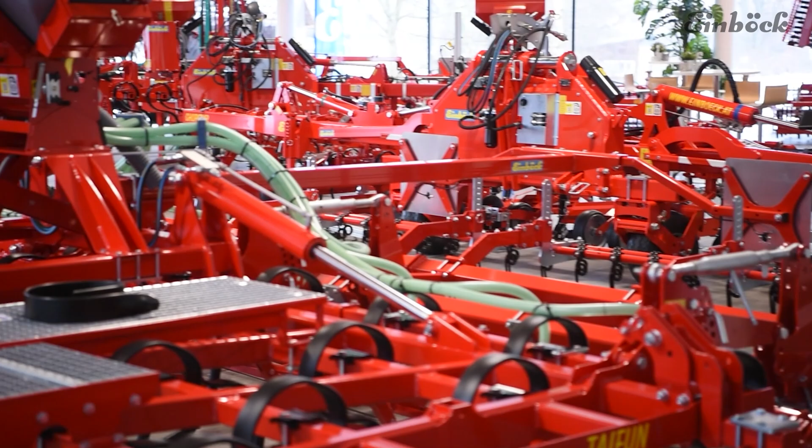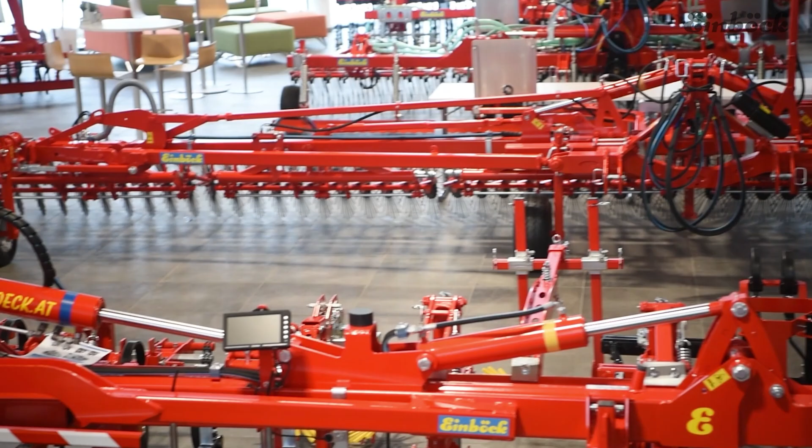Yes, and after this short introduction in our showroom, we are starting with our presentation about economical grassland care, how to increase feed quality and secure yield. And Johannes, what are our topics today? So the topics for today will be, of course, yield targets and especially yield targets in mid-European countries. What are the problems in grassland, management errors, and how you can optimize your grassland with the perfect components.

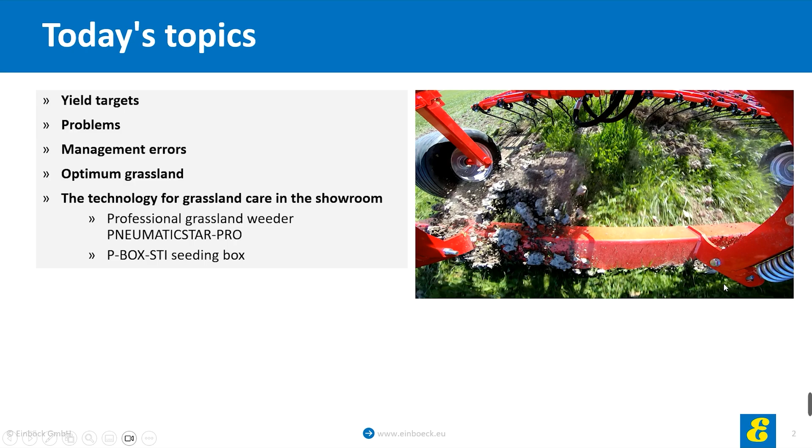From the technical side, we will discuss a little bit about our most professional grassland weeder, the PNEUMATICSTAR-PRO, which will be also then shown in the showroom, as well as the P-BOX-STI with our demo box. Yes, before we talk about grassland care, we are talking a little bit about our company. So Einböck was founded in 1934, which means we are this year 90 years old, and it's managed in the third and fourth generation by the Einböck family.

We have one single production site in Upper Austria near the German border and 100% in-house competence. That means from construction to cutting, welding, painting, assembly, and to the delivery, we are doing everything on our own. That's approx 90% vertical integration. We have a team of 225 employees and about 15 to 20 apprentices, and 90% of our machines we export.

What is very important to us is environmentally friendly production. So it's not only important to produce environmentally friendly machines, also the production should be like this. And the total production area is about 75,000 square meters. So after this short introduction about the Einböck company, we are starting right away with today's topic.

So we're gonna ask ourselves today four quite important questions when it comes to grassland care. So the most important, I guess, is how satisfied are you with your yield and your grassland in general? What is the energy content and what is the protein content in your grass silage? What is about the substance on the grassland? Is it heavily matted or do you have a lot of weed pressure on your grassland, which is reducing the quality? And then, of course, how can I improve the quality of my forage and also the yield within the recent years?

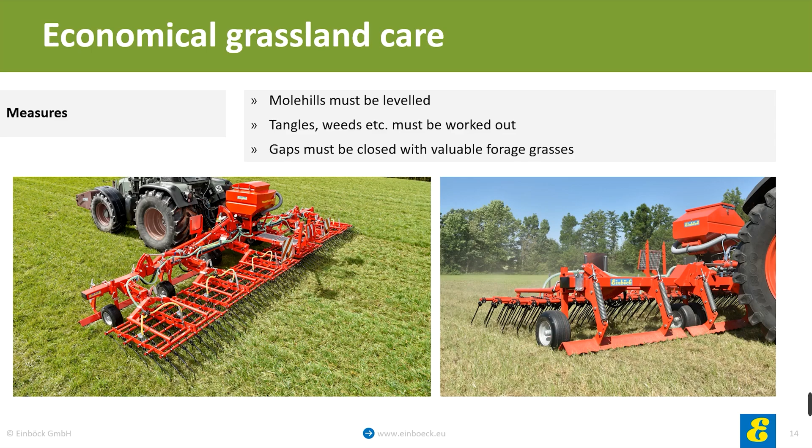So what is important for perfect grassland care? The molehills from spring should be leveled out as well as possible. Tangles and weeds, but also dead and old grass need to be worked out, and in very hard cases will be driven away from the grassland with a loading wagon. The gaps need to be closed then with high quality grasses and herbs. Otherwise the weeds will get back into these gaps and grow again.

So when to reseed? When is the right time to do the reseeding? There is not only one answer for that. We can reseed with the first pass in the spring, just adding approx 10 to 15 kg of seeds depending on the gaps. The spring helps the seeds to grow due to the high humidity. After the first cut, there is also a possibility to reseed, but it's only recommended in areas with higher humidity.

For a total renewal, with weeding 2 or 3 times and driving away the old material, we choose the late summer or maybe the autumn. After the cut, the grass is not so strong anymore, and the reseeded grass in the gap can grow with lower competition than it would have in spring.

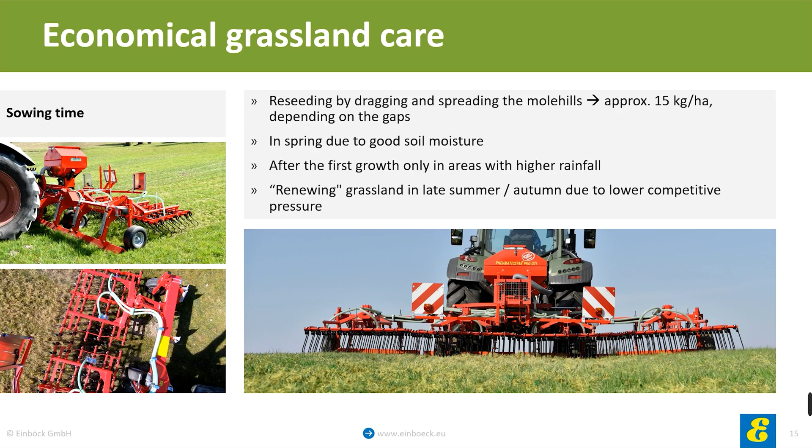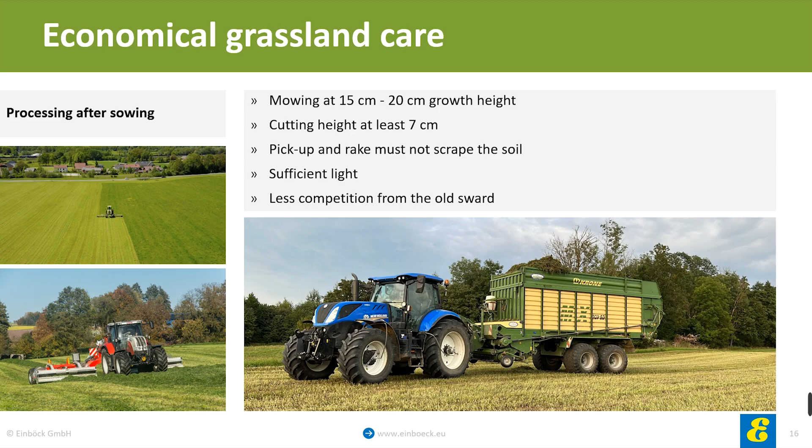After reseeding, the first cut should be done when the grass is approx 20 centimeters high. The smaller reseeded grass needs light again, and cutting height should not be lower than 7 centimeters. Then take care about the rake and the pickup. They should not be too low, so the seeds are not pulled out of the soil again. Through the early cutting, the new grasses and herbs have more light and do not have so much competition from the old sward.

So what could be different grass mixtures we can use for a proper reseeding? One of the most popular grasses is the English or German ryegrass, which has a quite high forage quality. It is resistant when cows are grazing and there is wet weather, and also tolerates frequent cutting, so we would say 4 to 5 or maybe 6 times a year. It grows quickly and is very good for closing gaps, so it's perfect for reseeding.

Then we've got, in addition, the Timothy grass, which is also quite resistant and is also really resistant during the winter. Still, it is a high forage quality grass. Then legumes and important sources of protein are the clover, I would say, a good gap filler, and it binds nitrogen. Also, we use red clover or lucerne alfalfa, which is quite durable during dry periods. And then, of course, in the mixture, we would need some herbs, which are giving the food some taste, I would call it, and increase the mineral content.

So how could we summarize this all? Of course, we need to determine the causes. What are the reasons for my lack of forage yield and quality? Weeds, gaps and meadow grass, lack of high quality grasses and herbs in the mixture, damage due to heavy tractors or mechanical damage by animals. That all needs to be sorted out and counteracted with the right strategy of reseeding and weeding. And then, of course, the harvest will be increased successfully again.

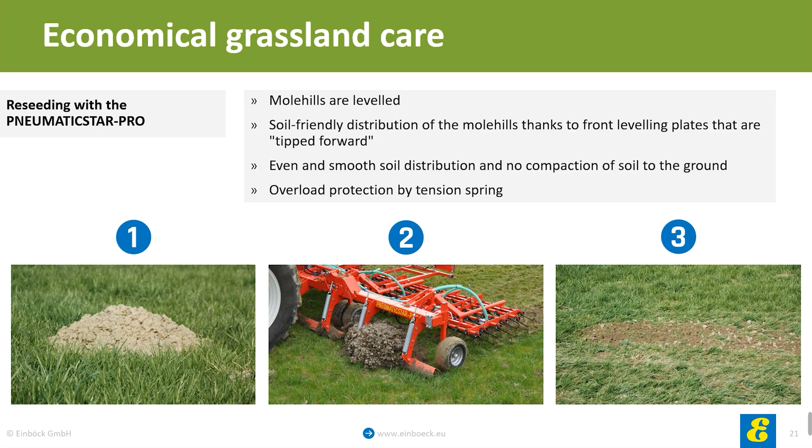The tines are always looking into the same direction. They are guided by a plastic holder. This guarantees a full vibration of the tines and a good soil adaption of tines. And this also brings us a long life due to the reliable plastic holders.

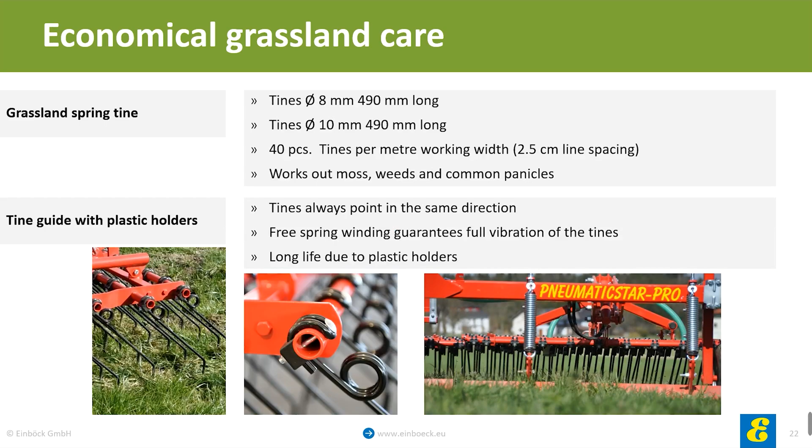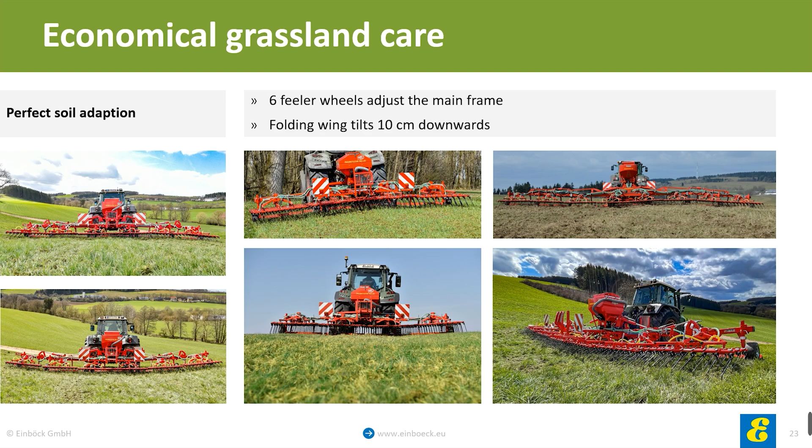And after the tines, there are no rollers on our grassland seeders. Why are there no rollers? There are different reasons why it's not good to have the combination of rollers and a weeder in front. So the first reason is the driving speed. Weeding is best between 8 and 10 kilometers per hour. When driving 8 to 10 kilometers, we have the best work of the spring and the best aggressivity.

And with a roller, I need to drive 4 to 5 kilometers per hour to have the ideal work of the roller. So the driving speed is simply different. And rollers are not necessary when doing annual reseeding for grassland care. They are only necessary when doing a completely new seeding of grassland to press down the new grassland.

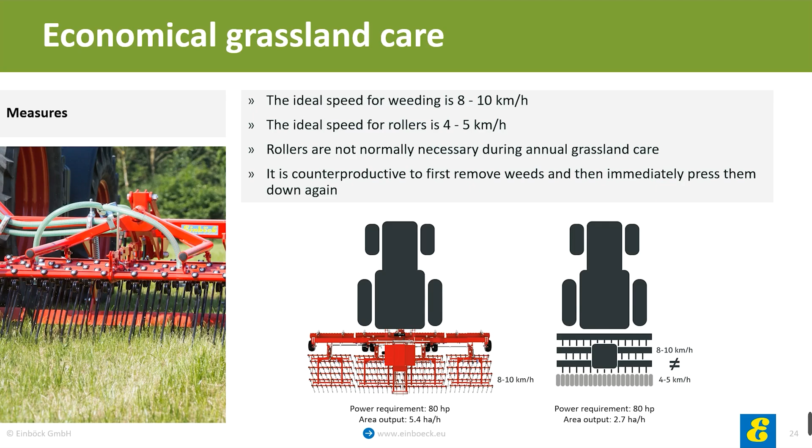So it's counterproductive when I do annual grassland care, when I remove weeds and then immediately press them down again to the soil. So yes, when doing new grassland seeding, I need a roller, but in a split work. So I need to first seed and weed, and then in the second work I use the roller to press it down.

What makes our PNEUMATICSTAR-PRO so special? It's the hydraulic level compensation of all the 1.5 meter sections. You see in the picture that we have on every section a hydraulic cylinder, which is pressing down the full section. By pressing down the section from the tractor hydraulic, from the tractor cab, the machine can be set very aggressive to the soil. This means that a lot of weeds and old moss and old grass is worked out, so the machine can work very aggressively, which I simply need when doing grassland care.

So the hydraulic is distributed to all the sections. When I have a 6-meter machine or 20 feet machine, I have 4 sections, and when I have a 30 feet machine, 9-meter PNEUMATICSTAR-PRO, I have 6 sections. So the down pressure from the tractor cab is always distributed on all the sections, so I have on every section the same down pressure.

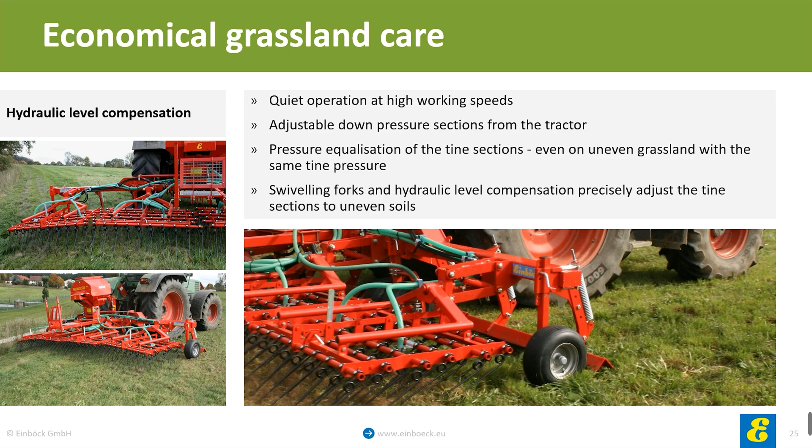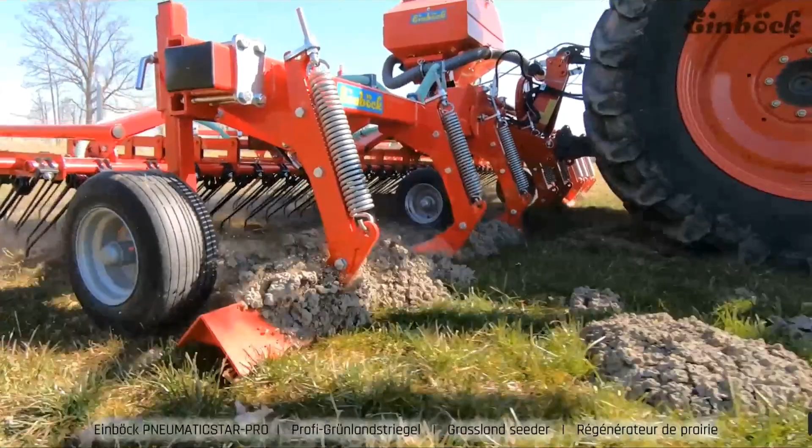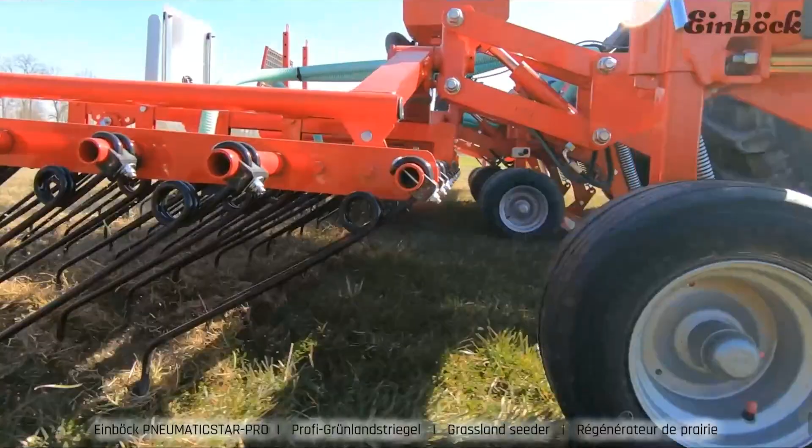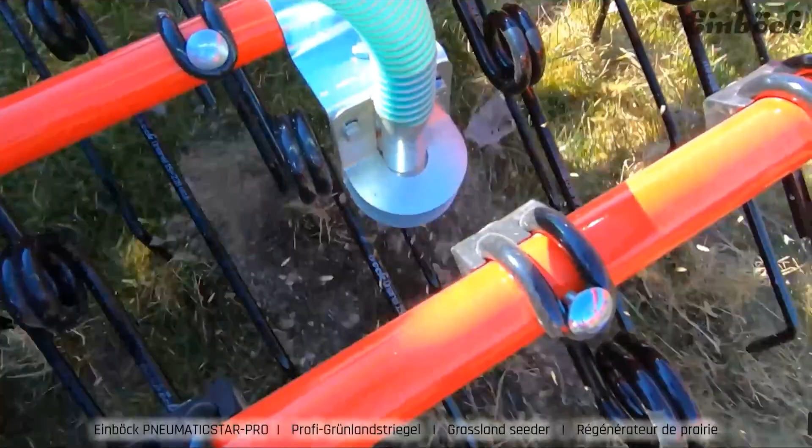In this video you see the PNEUMATICSTAR-PRO working in spring. So first molehills are leveled. You see very well that they are throwing the molehill soil into the air and distributing it evenly and smoothly on the ground. Then you see here reseeding is done. With the first 3 tine rows, we work out the weed and the old grassland and moss, and with the last 3 tine rows, we distribute the seed.

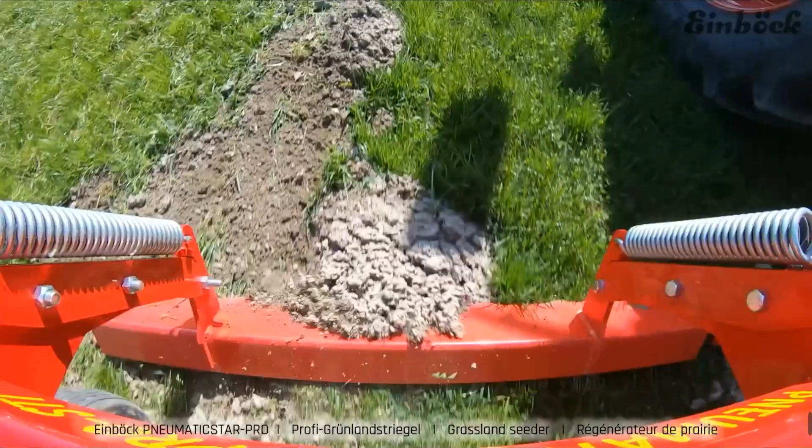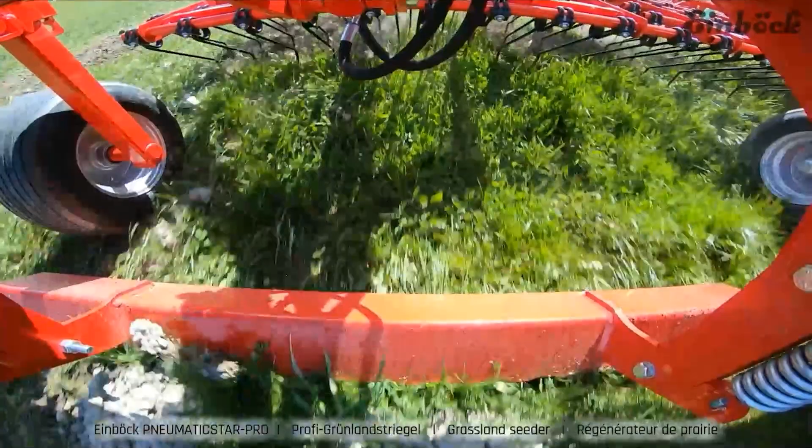Again, the triangular front leveling board working with its spring. Here you see the hydraulic cylinder of every section, and this is how a perfect field looks after mechanical weeding and reseeding. Shaking of the tines: very important that the tines are working aggressively and are shaking from left to right. A lot of dead material and weeds are weeded out, and reseeding is done at the same time.

I already mentioned it. Grassland renewing is not the same as annual grassland care. The annual grassland care is done in spring, depending on the area, March or April, or can also be done in late summer, so August or September. And grassland renewing is normally done in late summer, also depending on the area.

So first, several passes are needed with the tine grassland seeder to weed out or comb out unwanted weeds, moss and old grass. And here a close line spacing is very important. So with the 2.5 centimeter spacing and 10 millimeter tines, the grassland seeder PNEUMATICSTAR-PRO is the perfect machine to do grassland renewing.

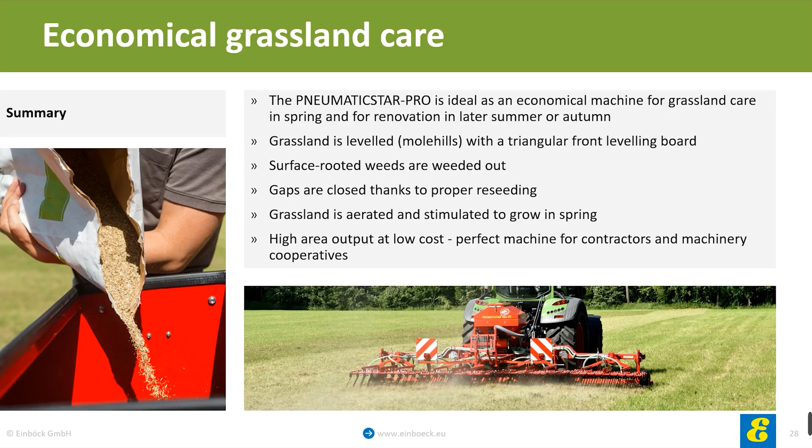So the grassland is aerated and stimulated to grow, especially in spring. The machine brings a high area output at low costs. So it's the perfect grassland seeder for contractors and machinery cooperatives.

After introducing you to our Grassland Seeder PNEUMATICSTAR-PRO in our presentation, I will now show you the machine in our showroom, and there you can see a little bit more detail and the machine setup.

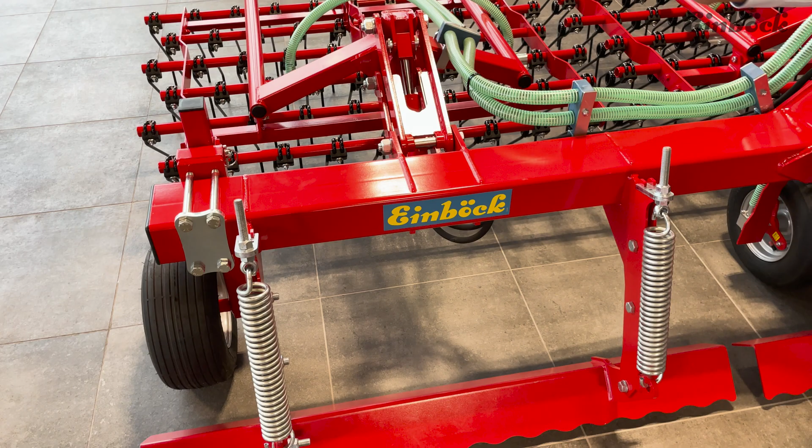We are now back in our showroom, where we are standing in front of our professional grassland seeder PNEUMATICSTAR-PRO. I will explain the machine to you now in more detail. So we see here again the main frame that can adapt and follow the soil conditions or the ground perfectly. The wings can go down and upwards up to 10 centimeters in each direction.

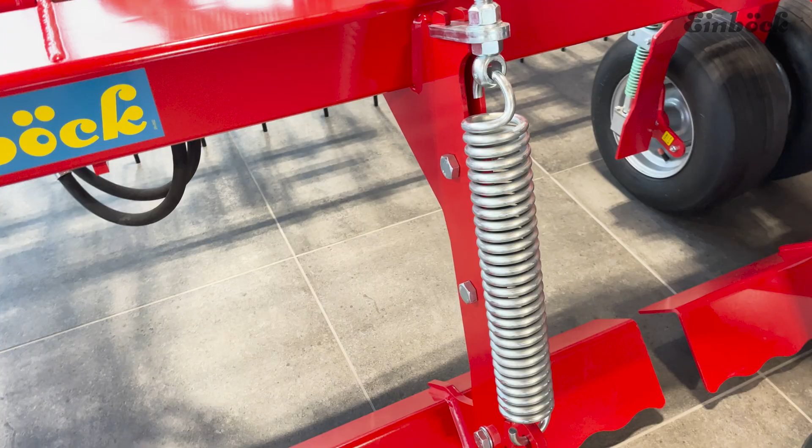And as I already mentioned, the triangular front leveling plates are directly mounted on the main frame, and the spring protects them when a big rock is coming. So the soil distribution is smooth and even on the surface. The soil is distributed with this triangle plate perfectly into the weeding section.

Behind the front triangular plate, we have on the main frame, in this case on a 6 meter, 20 feet machine, 6 wheels that help the machine follow the ground perfectly. On a 9 meter or 30 feet machine, we have also 6 wheels and again 2 on the outer wings, so in total 8 wheels.

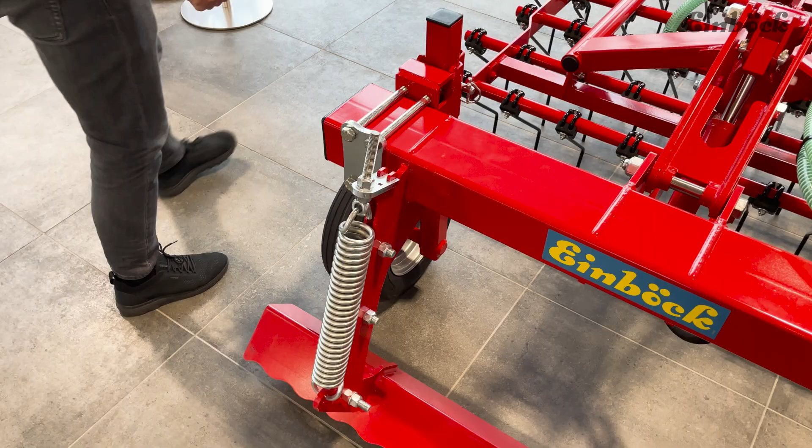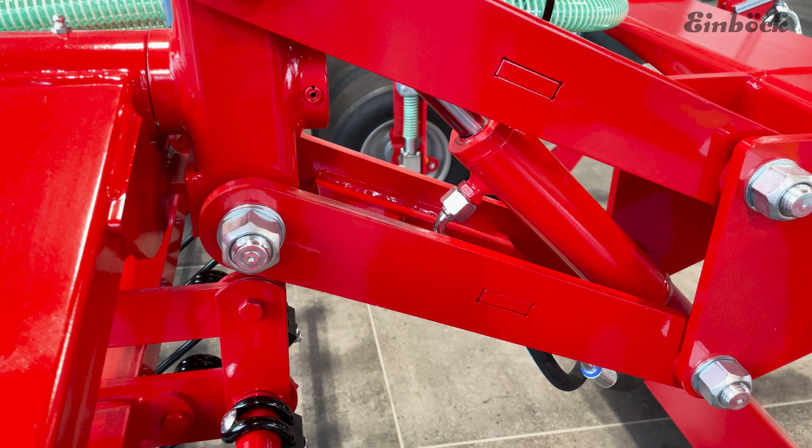The heart of our PNEUMATICSTAR-PRO professional weeder is the hydraulic adjustment of the aggressivity. With this parallelogram guided section, we see that this 1.5 meter weeding section with all the tines on it can bring enough pressure into the ground to weed out all the grass, dead material and weeds that we want to bring out of the grassland.

As we see, all, in this case, 4 sections are linked together, so I adjust the hydraulic pressure once in the tractor cab, and the pressure is adjusted and divided between these 4 sections on a 6 meter machine or 6 sections on a 9 meter machine.

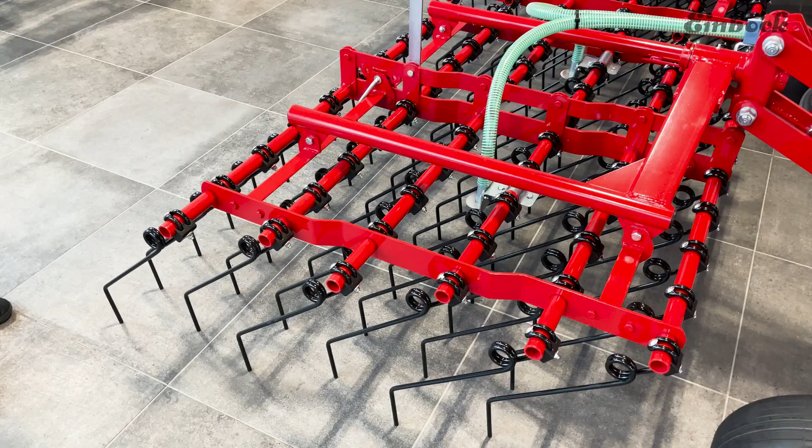On all these parallelogram guided sections, we have the tines mounted. We have 60 tines on a 1.5 meter section, which brings us to a tine distance of 2.5 centimeters, so 1 inch tine distance. This is very important when you want to weed out a lot of material and a lot of organic dead material. So here a very narrow tine spacing is important.

We can mount 8 or 10 millimeter tines. In this case, we have 10 millimeter tines mounted. The bigger the tines are, the more aggressive they can work. So especially when it comes to renewing grassland, the 10 millimeter tines are the best solution and the best option.

We have 6 tine bars. The first 3 tine bars open the surface and weed out weeds. Then new seed is distributed here via these distribution plates. And the last 3 tine rows work the seed into the ground and lay it on the open spots.

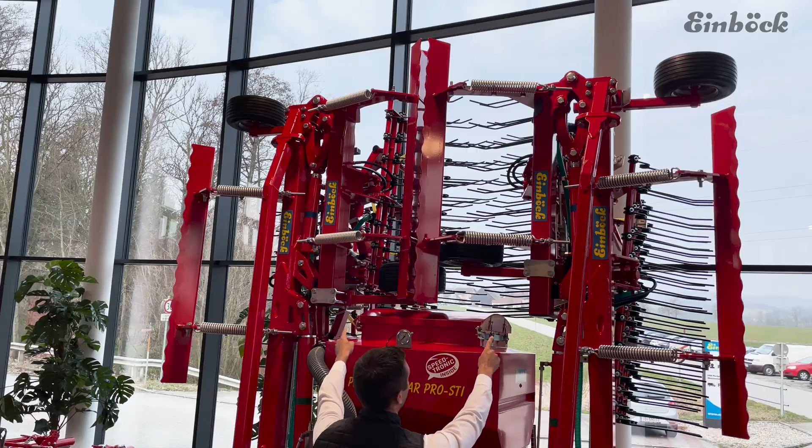This is the setup of the 6 meter machine, and we are going now to the 9 meter machine, where I will show you its setup. Here we are now in front of the 9 meter machine. We have now a double folding frame, so you see that there are 2 more wings which are folding inwards. This brings us to 9 meters and 30 feet. The principle is the same.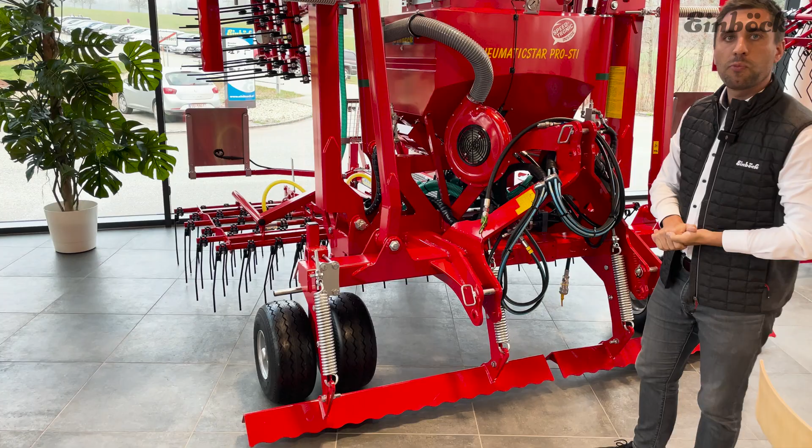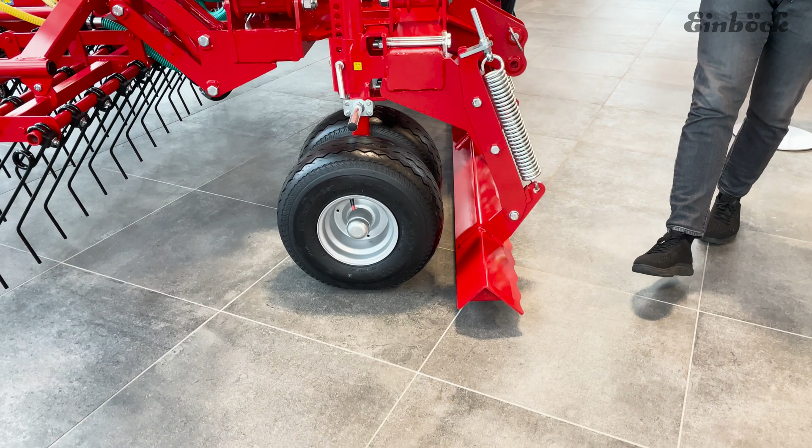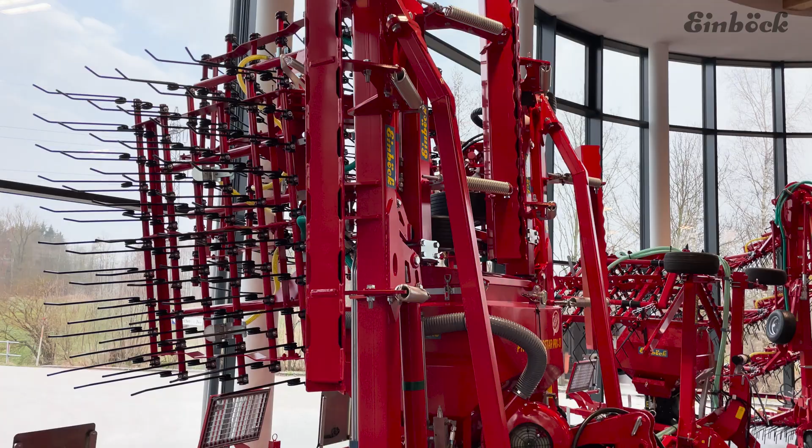Again, big triangular front leveling plate, strong frame, especially made for big farms and contractors with a lot of hectares. Again the wheels, in this case 8 wheels, 1 on each wing and 2 double wheels in the middle, and the same system on the back, parallelogram guided sections so that I can bring enough pressure into the soil and on the grassland. And in this case, again, 10 millimeter tines and distribution plates to seed or reseed grassland.

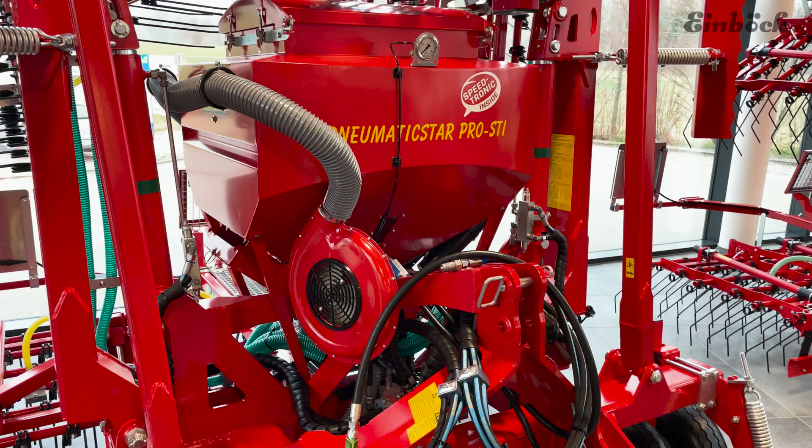Reseeding and seeding grassland I'm doing with this box. It's called P-BOX, so P-BOX-STI in this case, with electronics inside. I adjust everything in the tractor cab with the STI monitor, and my colleague Johannes will show you this now in the presentation and also in the showroom.

So now we are back in our presentation office, and we're going to take a closer look at our P-BOX-STI, which is most commonly mounted on the PNEUMATICSTAR-PRO. Our P-BOX-STI is an electric-driven seeding unit with a very precise dosing system. So what can you seed with it? Of course grass reseeding, then catch crops or cover crops, interrow crops, for example in maize, but we have also already mounted boxes on our CHOPSTARs to do fertilizer, cereals, legumes, or other mixtures.

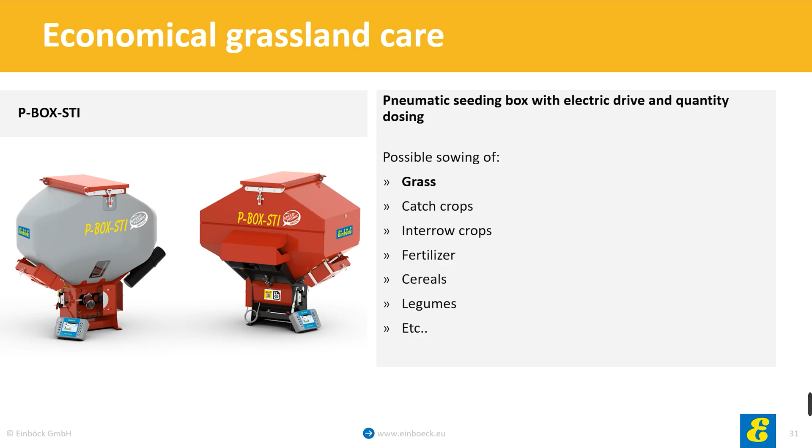The P-BOX-STI is operated with our terminal Speedtronic. It includes an automatic computer-controlled constant seeding rate, then of course graphics and a colorful menu navigation, which is quite easy to handle. We also have 15 different languages which can be chosen in the settings, a large 5-inch color display, many individual settings, for example sensor settings or speed calibration, and of course the terminal itself is resistant against dust and water.

Even if it falls on the floor, it should not break, and it is really compact and robust. It is easy to grab, and the keys and buttons are haptically raised, so you can even operate it blind.

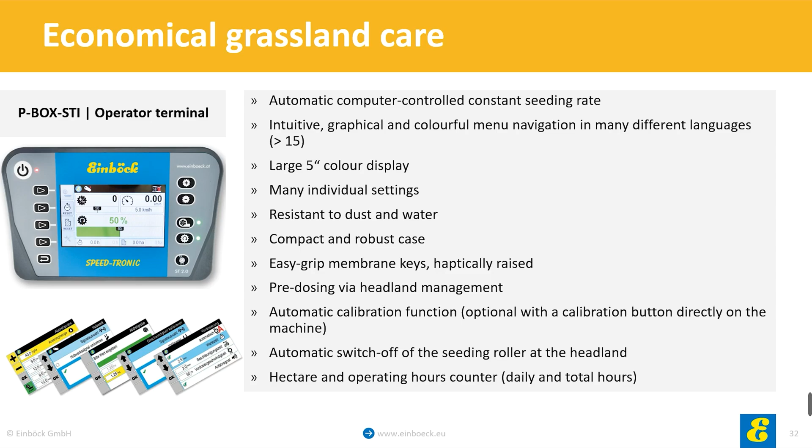Pre-dosing is also available via headland management. The automatic calibration function with the calibration button directly on the machine helps when you do the calibration for seed. When you come to the headland, the terminal will switch off the seeding function automatically by either the upper link sensor or the 7-pole cable from the tractor cabin. And it also includes a hectare and operating hours counter.

The Speedtronic system was developed by Einböck, and due to the various seeding rollers, a very wide range of seeds can be used. The different seeding rollers are changed very easily, which can be seen on the right-hand side picture. The distribution plates also allow a very precise seeding.

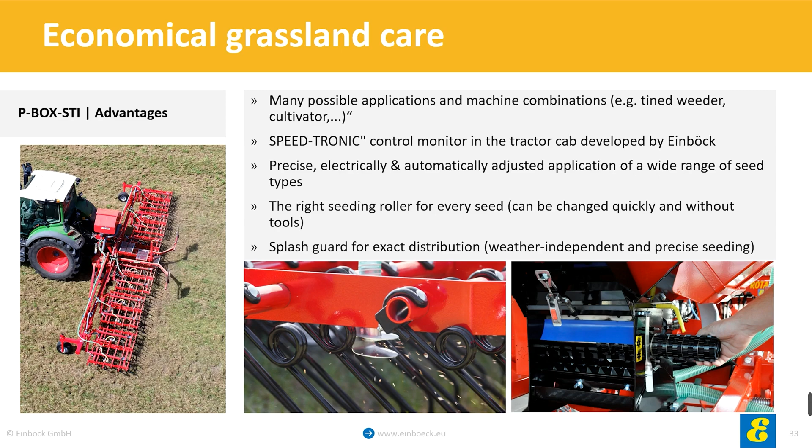And now, here on the video, we can see that the PNEUMATICSTAR-PRO works out a lot of old and dry grassland, whilst the P-BOX is reseeding some grass and the distribution plates are perfectly spreading it. Now we will head out to our showroom, and I will show you the P-BOX-STI in detail on our demo machine.

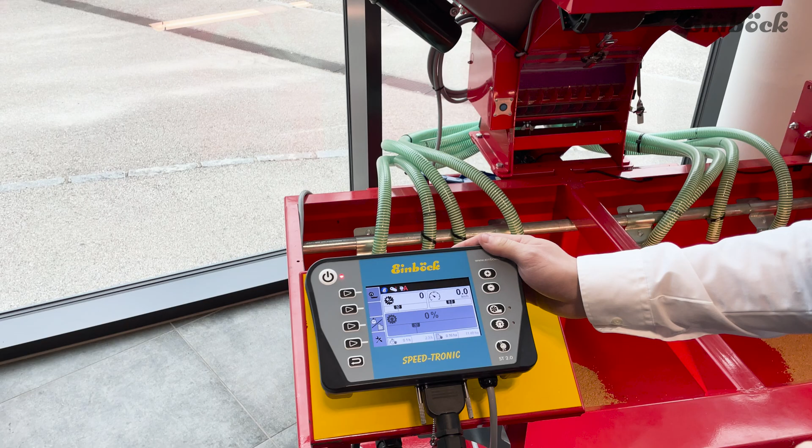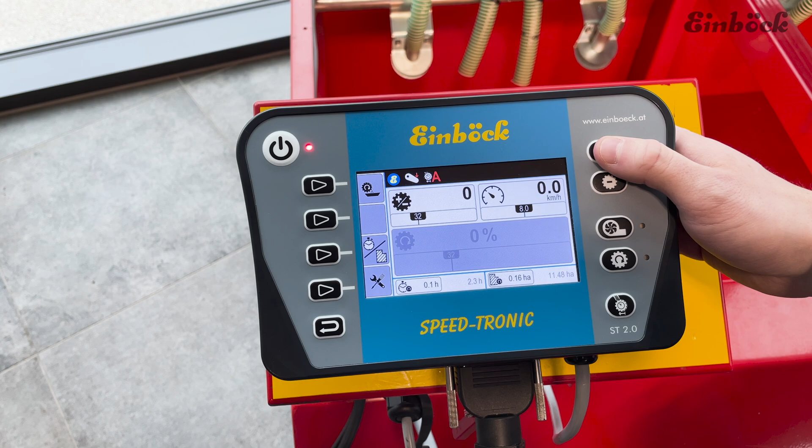We are now back in our showroom, standing next to the P-BOX-STI demo machine. Here we can see the Speed-Tronic terminal. On the main menu we have the driving speed, and here the speed of the seeding roller is shown. On the right-hand side we can adjust the speed of the seeding roller while we are driving. Also here we can activate the fan and the seeding roller.

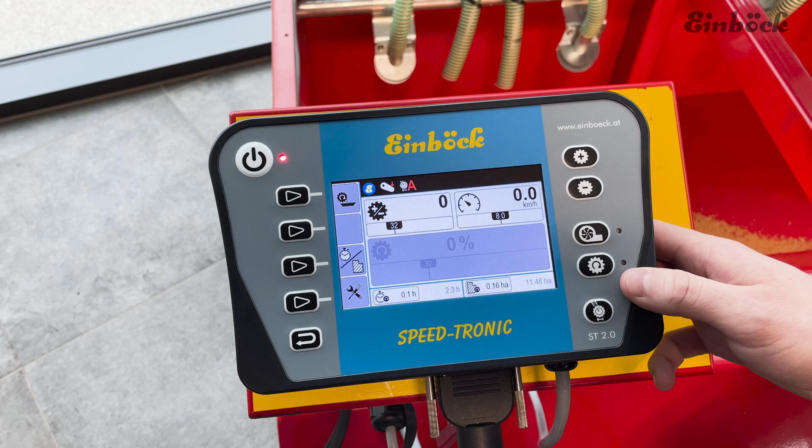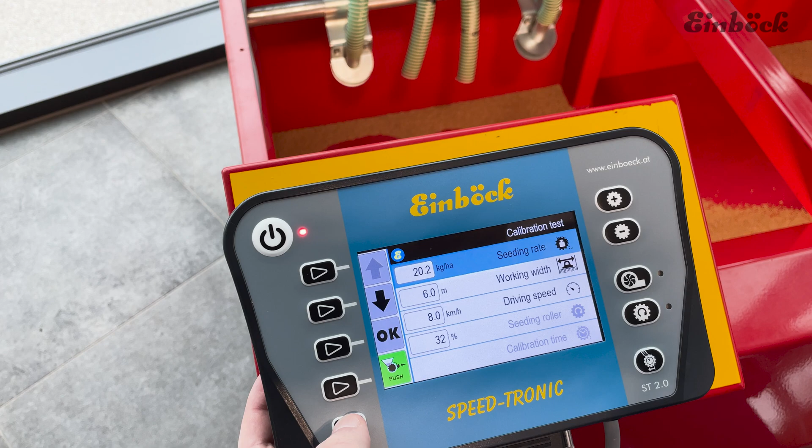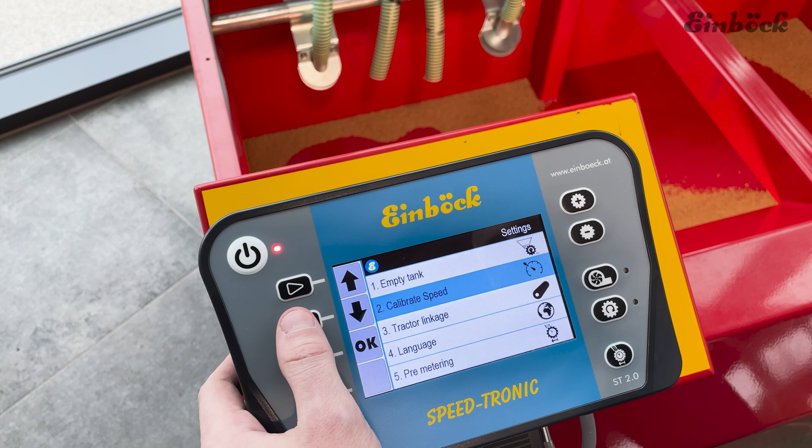On the left-hand side we've got the area counter and the hour counter, and here we can start the seeding calibration. Also we've got the main settings inside here, such as emptying the tank or calibrating the speed. Also we can set some other sensors inside here.

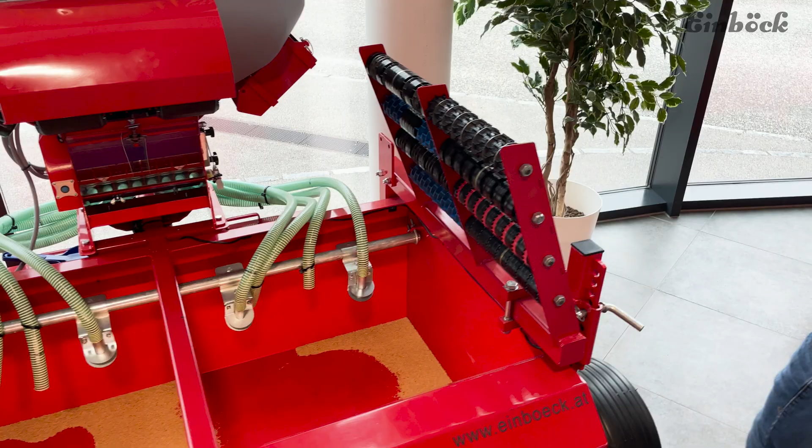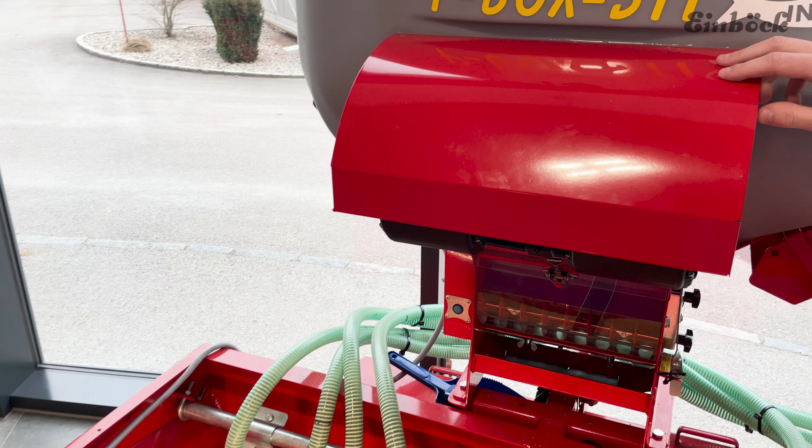Right here we can see our 8 standard seeding rollers, starting from the biggest to the smallest, and also we've got some special seeding rollers when we only have 6 outlets. On this demo machine we've got the electric blower, which is up to 40 kg per hectare output or 6 meter working width.

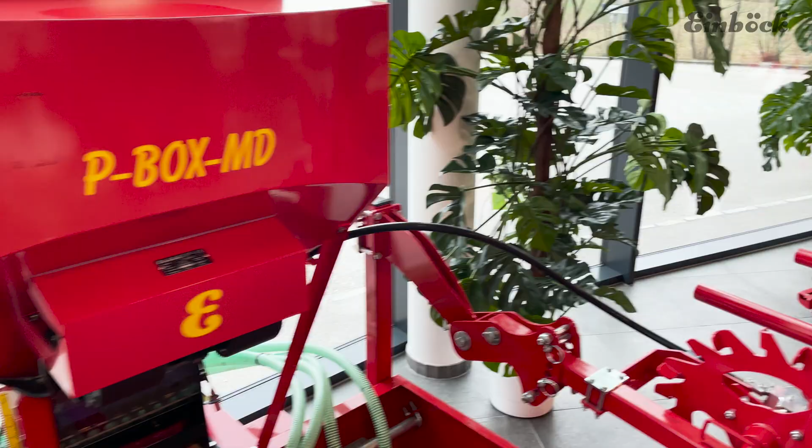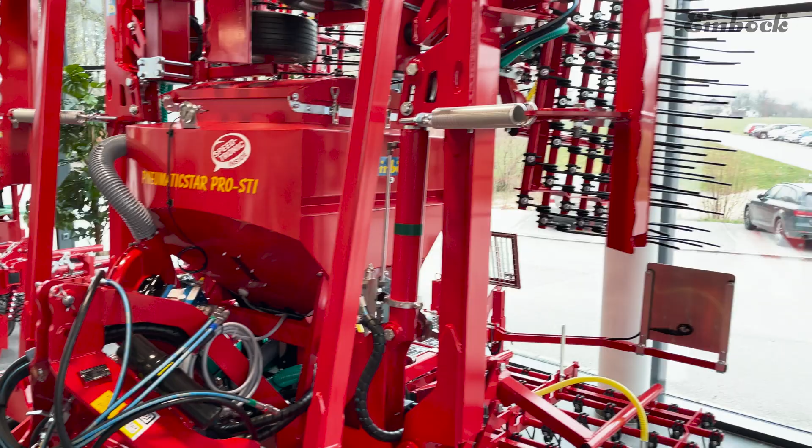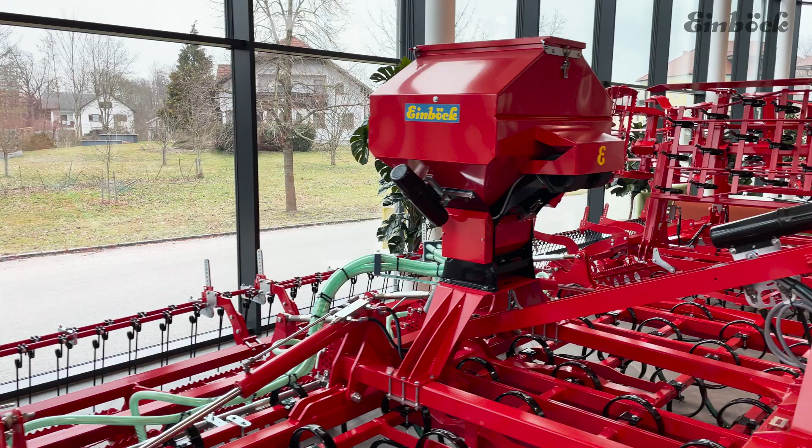In addition, for bigger working widths, we use either a hydraulic fan, which we can see here on the PNEUMATICSTAR-PRO, or a PTO blower. Both are working up to 12 meter working width or 200 kilo output. The P-BOX can not just be mounted on our grassland weeders, but also on all other of our tillage machines or machines for mechanical weed control.

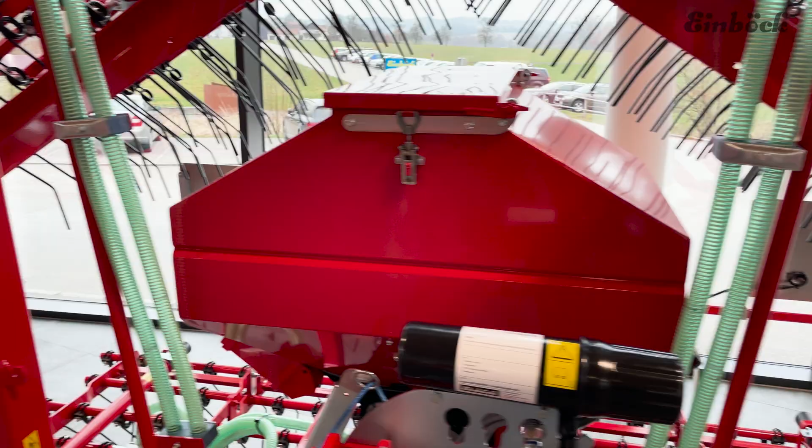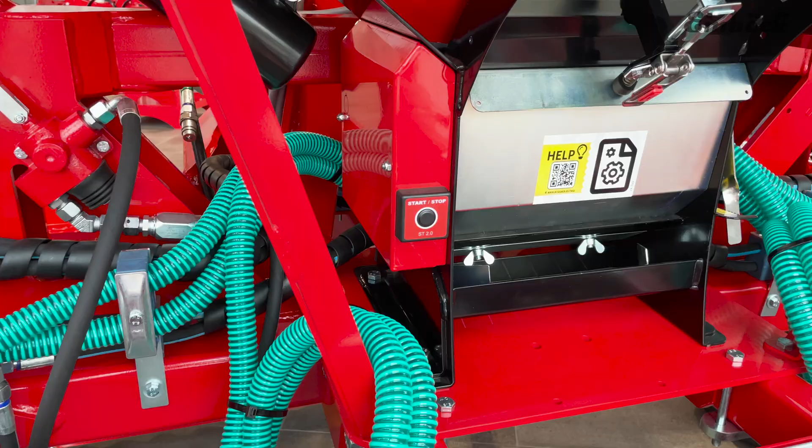The P-BOX is getting the speed signal by a 7-pole cable from the tractor cabin, or with a speed sensor and an upper link sensor. Also, a radar sensor or a GPS sensor can be used. The P-BOX can be equipped with multiple additional sensors, such as a calibration button directly mounted on the machine, but also an alarm when the tank is empty, or an airstream monitoring sensor.

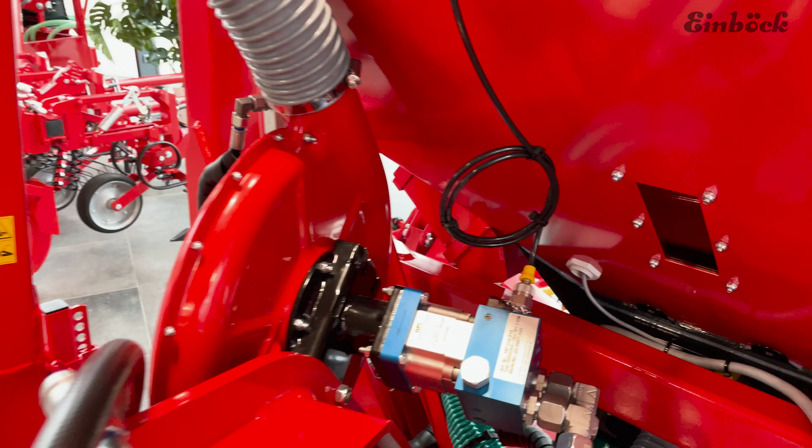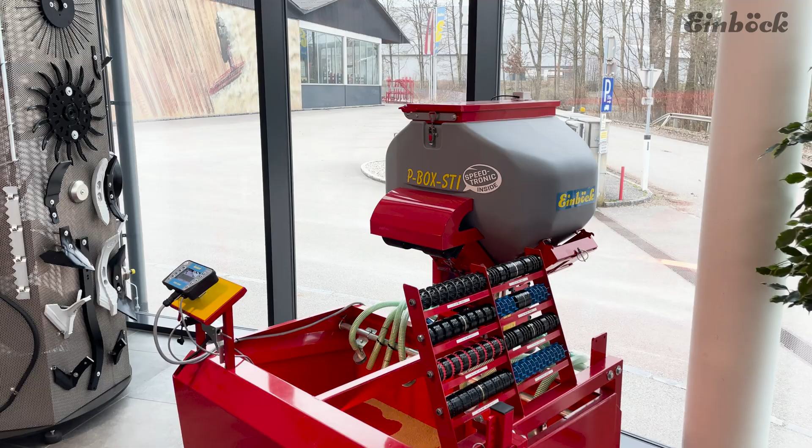The tanks are available in a 500 or 300 liter metal tank version, or we can also mount on our machines the 265 liter tank, which we can see here on our demo machine. Thank you, Johannes, for showing and explaining the P-BOX-STI in our showroom.